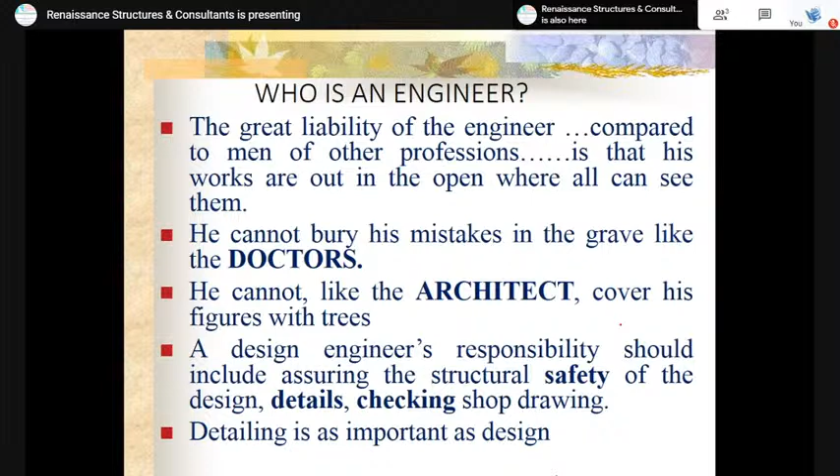So the design details, checking, shop drawings are the roles, and detailing is important, related to the design. The requirements of good detailing: it should be simple fabrication and placing details. This is important for your detailing sheet. Check the spacing for crack control, the maximum spacing, minimum spacing for concrete placement, and check the splicing requirements and the development length for your beams. Take special care of sections with varying depth and sloped slabs, and care of corner joints, beam-column junctions, openings, etc.

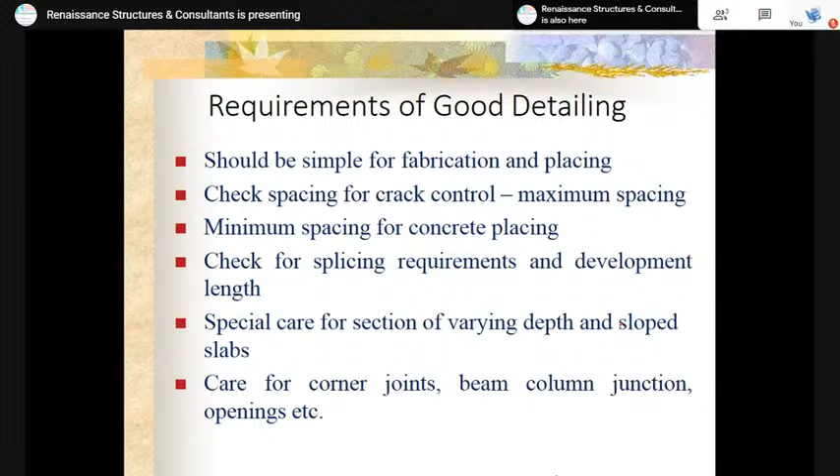You can refer to these for detailing. This detailing is for gravitational loads, which is different from lateral loads, especially seismic forces. So what are seismic forces? That is the earthquake load. The earthquake load occurs in the x and z directions. Okay, that is responsible for the strength of the building.

Okay, you can assign your seismic forces in your building. That load is for the entire structure, and that is called the seismic forces. Then you can define this particular load in your software and assign it in your building. And before that, you should know about the seismic zones, the seismic soil strata where it is located, and what the importance factor is. Okay, so these are all important.

Apart from the detailing above, there are different detailing requirements for the rehabilitation and strengthening of damaged structures. So this is also important. So SP16 and IS456 codes are needed for this.

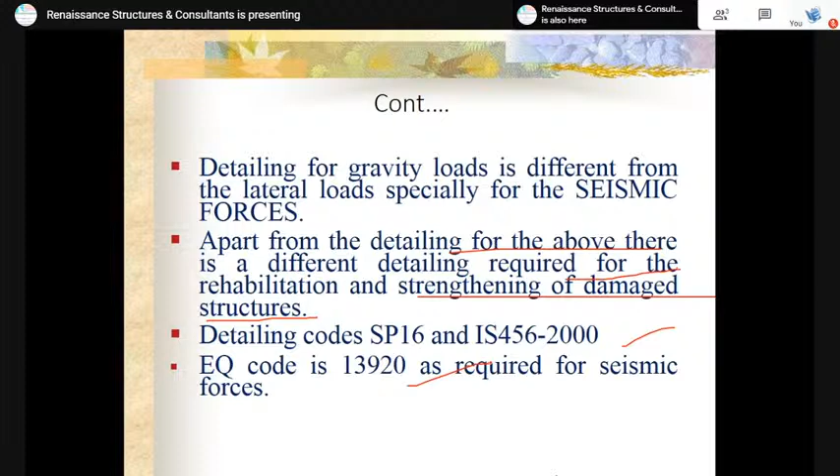Okay, next I'm going to discuss the objective type questions from these kinds of areas that companies expect from fresh students. Students should be able to explain questions from HR, from the company managing director, or from the site engineer, etc. So what are the questions from the design of RCC area?

Clear cover should be provided for each and every member. It depends upon the location of the building, the capacity of the building, and the design considerations. First, it is to develop the desired bond strength throughout the perimeter of the steel. That is called the bond strength between the steel and the concrete. Second, it is to protect against corrosion and fire.

And what is the minimum cover? First, 20 mm cover is needed for your slabs. A slab is a horizontal member where only the thickness is small. So you provide 20 mm of cover as a minimum for your reinforced concrete slabs. This 20 mm will keep your reinforcements safe against corrosion and fire, and the same 20 mm of cover maintains the stability of your bond strength, with respect to your cement and your steel sections.

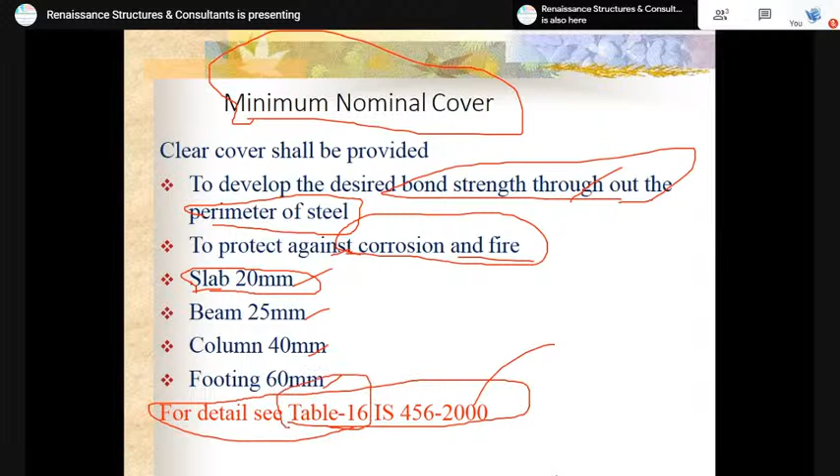Sometimes the design engineer asks questions to the students: which code book is suitable for cover? Minimum cover and maximum cover, what is the nominal cover, and which code book are these details from? So you can explain to that particular engineer or HR that these details are from the IS 456 code book, specifically table number 16 for cover. Then next is spacing of the reinforcements.

What is called spacing of the reinforcements? It is needed for any member. When you analyze and design your column, beam and slabs, you maintain proper spacing within your reinforcements. The horizontal distance between two parallel main reinforcing bars shall not be less than the diameter of the bar if the bars are of equal diameter, the diameter of the larger bar, and 5 mm plus the nominal size of the aggregates. So you check all three conditions. This is called the spacing of the reinforcements.

So you choose the equal diameter, the maximum diameter of your larger bar, or add 5 mm to the nominal size of the aggregate. Mostly we use 20 mm size of aggregates for RCC, so you assign 25 mm. That is the minimum spacing of reinforcements. The maximum spacing is as per the design, related to IS 456, particular to the column, the beam, etc.

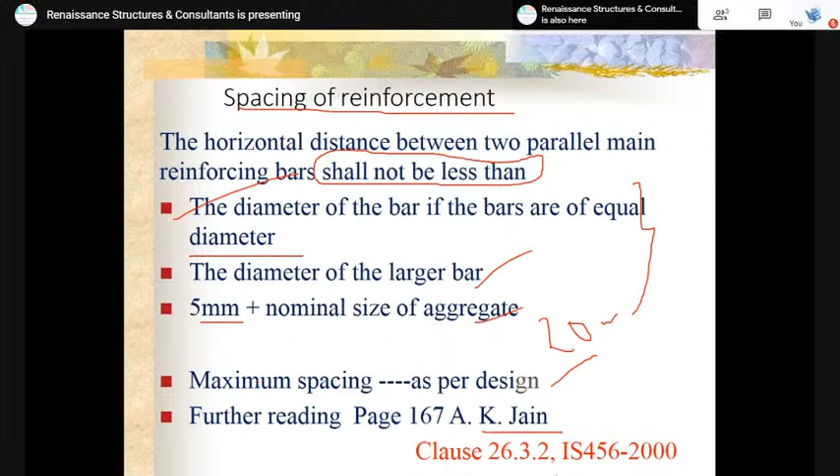Then limits for the reinforcements. So what are all the limits you can maintain for the beam? So minimum area of the reinforcement, that is As/bd, is equal to 0.85/Fy. Okay, this is from your IS 456 code book, which is related to the limit state method. Okay, so maximum of 4% of the bD.

What is called as 4% of bD? Then you can analyze and design without this problem. Nominally, you can find the percentage of reinforcement. For example, as per the basics of site experience, this is one of the columns. So this is for the b and D. So you can assign 4% of the reinforcement area in this particular column.

Okay, that is 1600 mm square. Okay, 1600 mm square is for your maximum of the reinforcements. So then you can choose the 16 mm bar, 20 mm bar, 30 mm bar, based on the availability of the reinforcement near your source. Then you can multiply by π d square divided by 4. So you can use 20 mm dia rod. You can multiply by π into 20 square by 4, and you can assign the number of rods, into 4 or into 6.

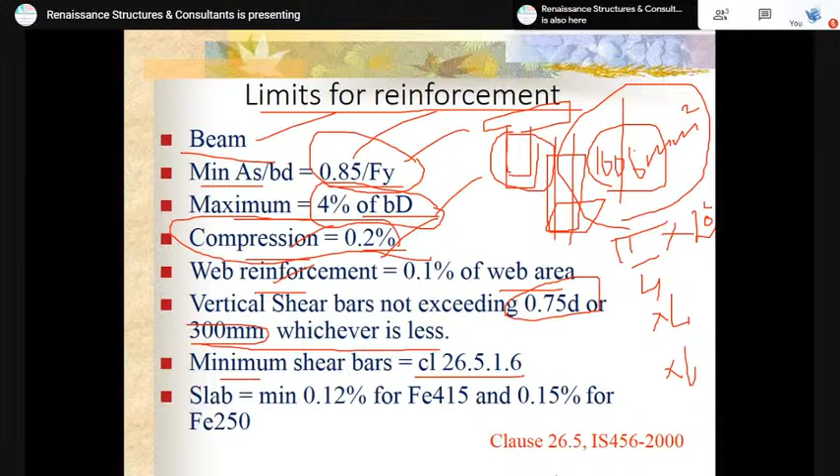Then the slabs. So minimum of 0.12 percentage for all flat slab surfaces. Okay, this is for the Fe415 and 0.15 percentage for the Fe250. This is one of the important interview questions. I'm going to use Fe415. What is the percentage of reinforcement in the particular slab portion? You can refer to this PPT. So 0.12 percentage for Fe415 steel, or 0.15 percentage for Fe250 steel. This is important during the interview.

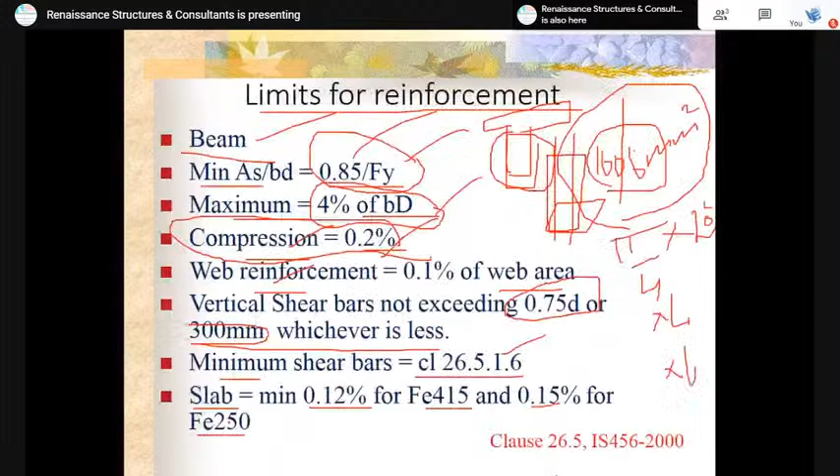Okay, and stirrups, what are all the ties possible? The minimum size is 8 mm. So in each and every building, the ties are minimum 8 mm nowadays, to resist the lateral load, and the hooks shall be bent at 135 degrees towards the end. It is called a 135 degree hook bend. And in columns, the bars are not less than 12 mm. More than 12 mm is suitable for your main columns.

Okay, a client, sorry, HR question is possible: I'm going to use 8 mm dia in this column. How many are needed to withstand the self weight of the column? You can explain: 8 mm is not suitable for the column member. So minimum is 12 mm.

This is from IS 456. So the spacing of the bars is not greater than 300 mm. You can assign that for your main reinforcement spacings. So the maximum you can utilize: 230 by 230 is for the residential building, 230 by 460 is for the commercial building, and as per the design specifications you can assign. But minimum is 230 mm.

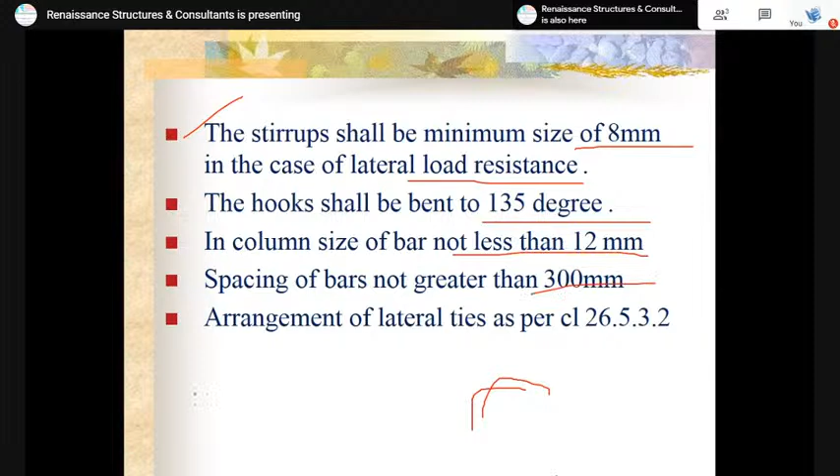So the spacing is limited to not more than 300 mm. So it is not suitable. It is suitable when you design for a multi-story building, where your column size is 460 by 460. After deducting this cover, your contacting surface area within the reinforcements is 300 mm. It is possible. Otherwise you can maintain the spacing so it should not be greater than 300 mm.

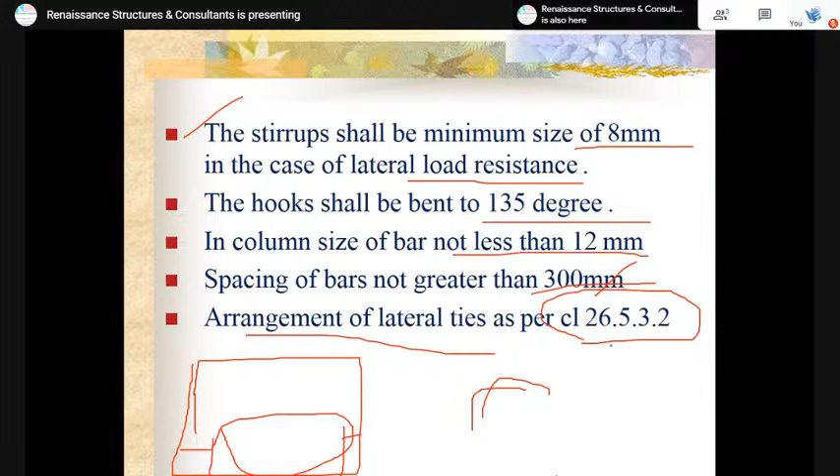The arrangements of the lateral ties are in the clauses from IS 456. So what arrangements are available? You can check this in the code book. So, development length of the bars. For concrete grade M20 and steel strength Fe415, you can maintain this kind of

development length. So serial numbers 1 to 9 are related to the dia of the bar. So you can assign the 8 mm dia in your slab or in your cantilever type of slabs. In the tension zone you can maintain 376 mm, and the compression zone is 301 mm. So this is the contacting length. What is called contacting length?

So I'm going to assign this 8 mm rod for my slabs. Consider this is the slab. Here I'm going to assign the support, and here the cantilever projection. You can consider 8 mm reinforcements, and you can connect one more length to the main support. So 376 mm is needed for development length.

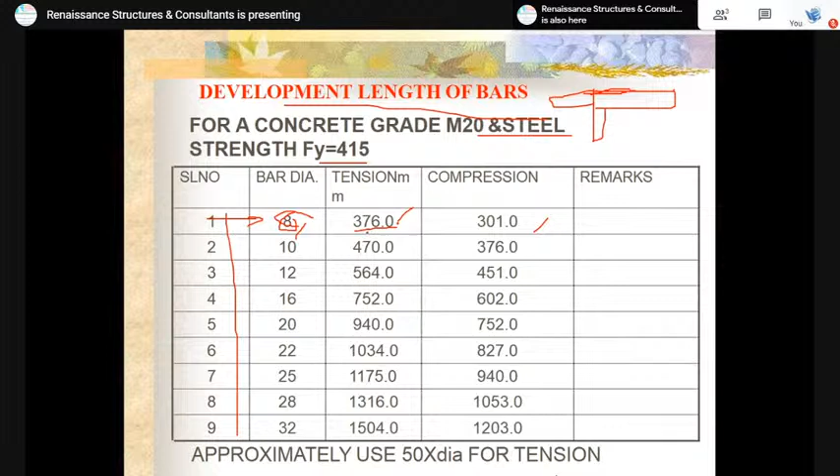So there is the normal reinforcement, and here you can assign this reinforcement. You put 376 mm, mm, not mm square. So that is needed in terms of the tension zone; in terms of the compression zone, you should maintain a 301 mm length. So simply, I'm explaining once again.

So this is my normal reinforcement. I'm going to add one more reinforcement, 8 mm rod, to the one end. Here one end is available, here one end is available. The reinforcement length is enough. 376 mm is for the tension zone, 301 mm is for the compression zone.

So it is available. This is an interview question for design engineer or execution department; people compulsorily ask this during interviews. Then you can assign 10 mm. So 470 mm length is needed for the overlapping, and 376 mm is needed for the compression zone overlapping. For 12 mm rod, 564 mm is needed, and 451 is needed for

the compression zone. 16 mm dia, used in your column, you can maintain 752 mm length for each tension member, 602 mm length for the compression member, and 20 mm is for 940, 752. 22 mm is for 1034 mm, 827 mm for the compression zone. 25 mm: 1175 mm, 940 mm is needed for the different tension and

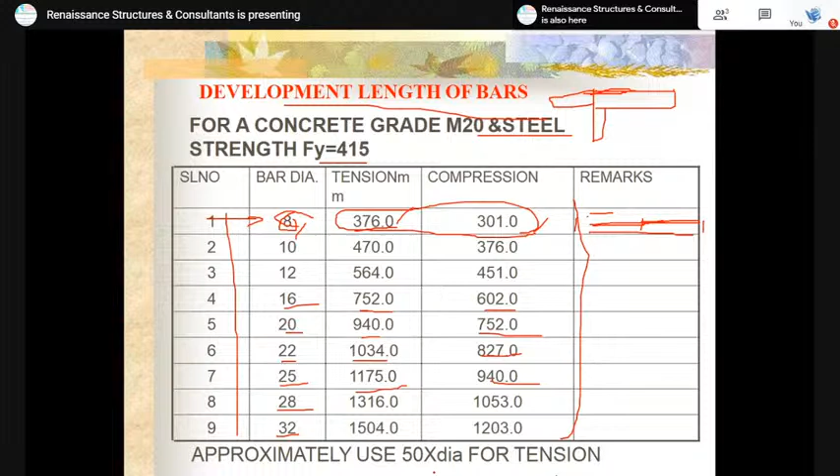compression. So 28 and 32 respectively for 1316, 1053, 1504, 1203. All the terms are in mm. This is all approximately 50 times dia for tension. It is also possible. So this is the lap splicing. The lap splices are also from clause 26.2.5.1 of IS 456.

So you can refer to what the spacing of your lapping is, and how to measure this lapping distance from here to here. What is this inclination angle? What is this length? What is this inclination? Everything should be in your clauses. Sorry, IS 456, clause 26.2.5.1 of IS 456.

So you can assign this position in your column. When you rise from G plus 2 to G plus 3, you must compulsorily make the lap splicing. It is needed. So you can arrange this reinforcement. It is a different height from your slab number 2, and this is the same height from slab number 2.

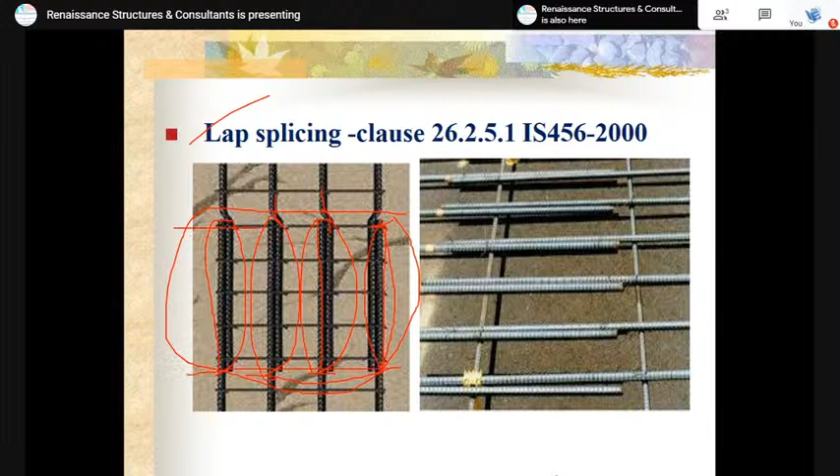This is for the different height from slab number 2. So these are all not equal, but you can maintain these in a zigzag arrangement - this here, this here, and this here. So zigzag-wise, this lap splicing arrangement is possible during the quality inspection of your constructions. You can check for this one.

Next is for lap splicing. Lap splicing should not be used for bars larger than 36 mm, so you can't assign lap splicing there. A 36 mm bar is not suitable for cranking - you'll face difficulties during construction. That's the reason lap splicing is not suitable for 36 mm bars.

Bars larger than 36 mm may be welded instead. You can assign two different 36 mm bars in your main column and weld them to that particular main column.

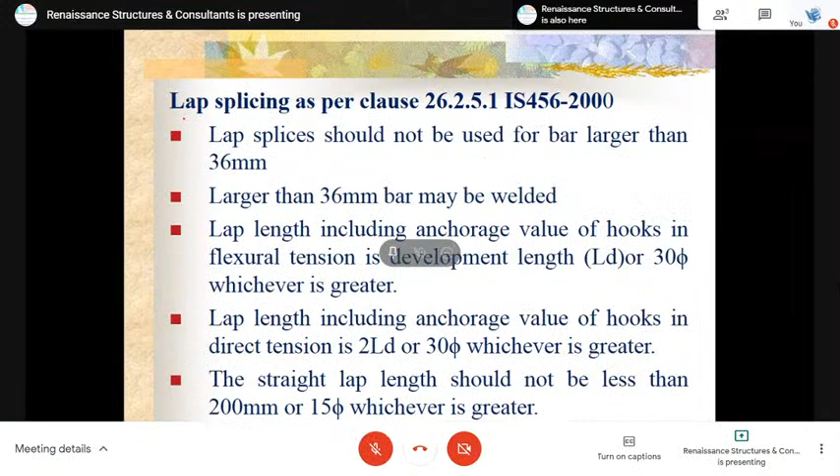Next is lapping length, including the anchorage value of the hooks in flexural tension. It is development length LD - LD means development length of your member, or 30 times your diameter, whichever is greater. You can assign it for the lapping length for anchorages.

You can assign it for the end zone - it is related to the flexural tension member. LD is L into the diameter, where L is the length of your member and D is the diameter of your bar. So you multiply to get one value, or 30 times 20 mm dia gives 600 mm - whichever is greater is the lapping length.

Or the lapping length including the anchorage value of hooks for direct tension is 2 times the development length, or 30 times, whichever is greater. Why the difference between these values? For direct tension you multiply by 2LD, for flexural tension you assign LD.

This is the difference between flexural and direct tension. So 2LD is for direct tension, and one LD is for flexural tension. The straight length of the lapping should not be less than 200 mm or 15 times the diameter, whichever is greater.

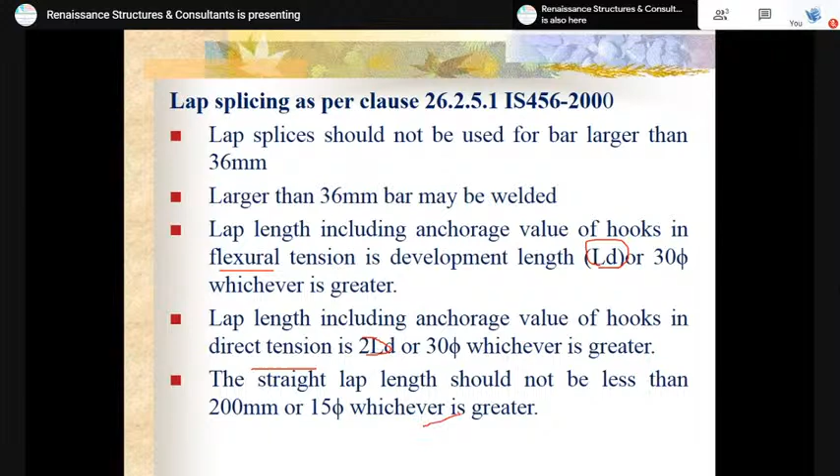This one is important for interview questions. So, continuing on lap splicing - these lap splices are considered staggered if the center-to-center distance of your reinforcement arrangement is not less than 1.3 times the lapping length.

So you can assign 600 mm - it is suitable, but this should not exceed 1.3 times the consideration length during staggered reinforcement.

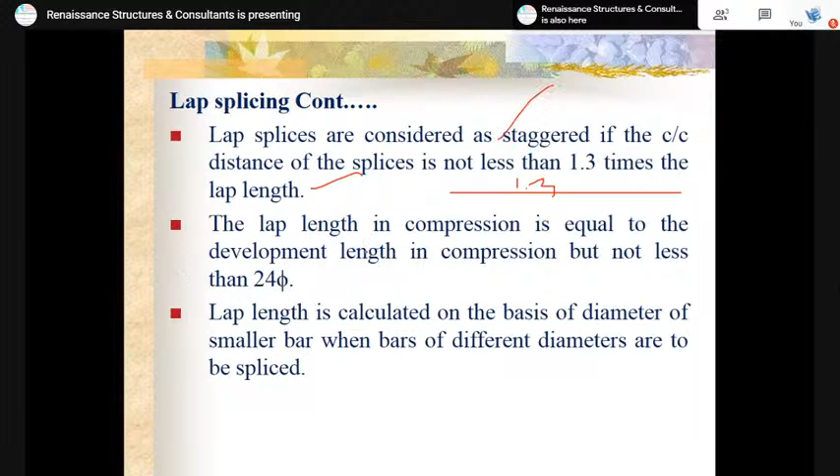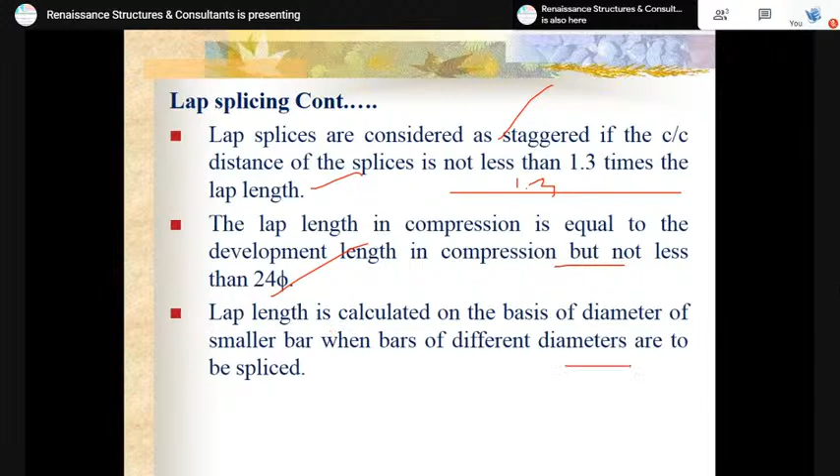So do the detailing properly - prepare the drawing properly and with accuracy. This is important, and prepare the bar bending schedule if necessary. This is also important.

Next is to indicate the proper cover to the reinforcement - this is important. Then decide the location of the opening hole, and adequate details for the reinforcement surrounding openings. This is important - you should focus on the reinforcement around openings and maintain adequate details to support the member surrounding extreme load-acting values.

And use commonly available sizes of reinforcement bar - spiral shall be used for reinforcements. You should assign available sizes; for example, if 23.5 mm is needed but that size is not available, you should use an available size of reinforcement for your design considerations, such as 8 mm, 10 mm, 16 mm, 20 mm, or 22 mm.

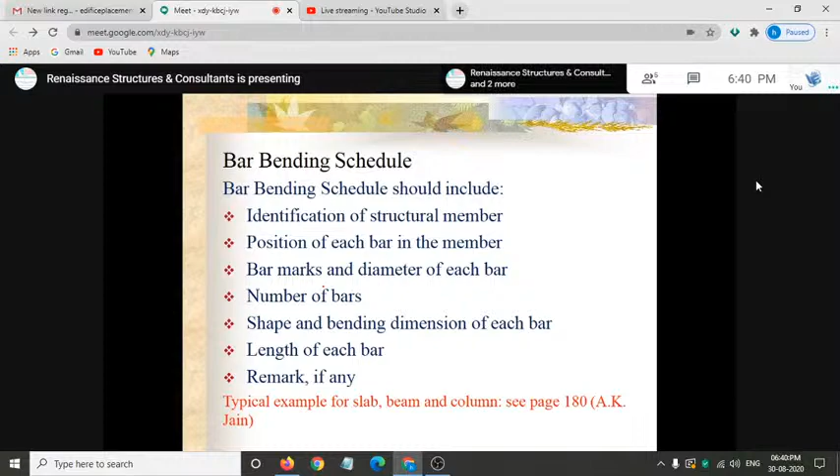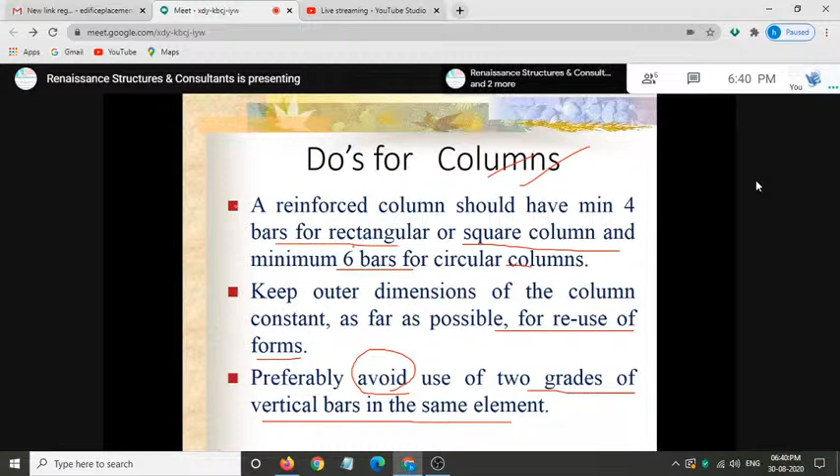So do's for the column, do's for the beam. So what are the columns? You can assign 4 numbers of the main reinforcement for rectangle and square columns. This is needed. For the circular column, you can use a minimum of 6 number of bars.

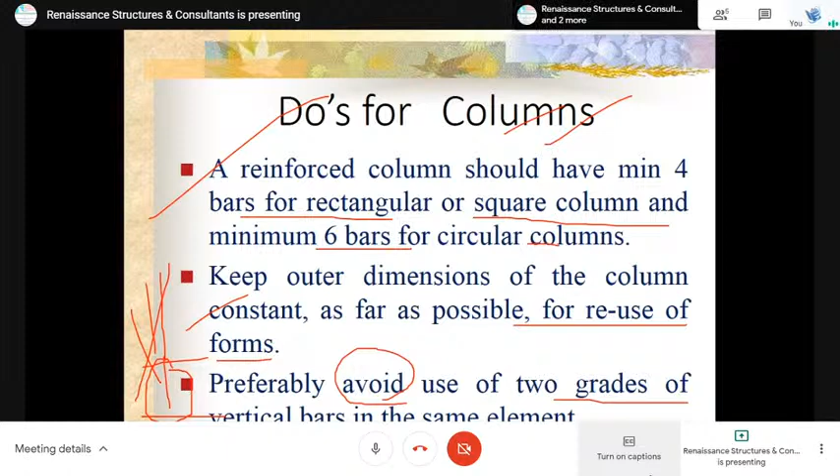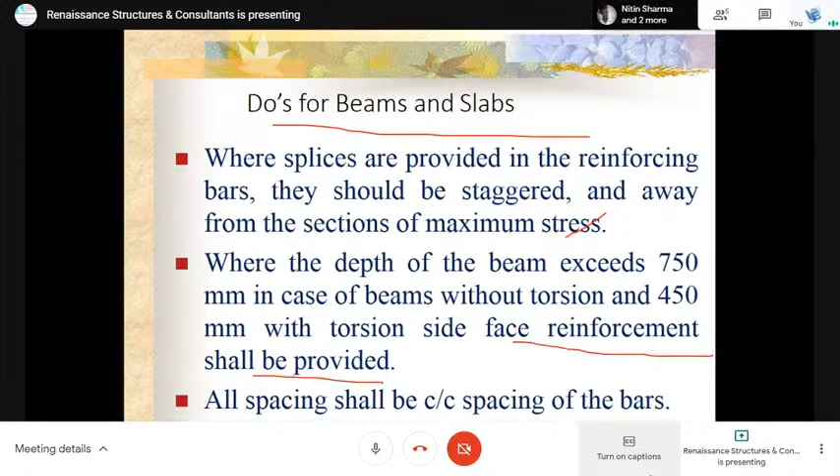Side face reinforcement should be provided. Facings are in the proper arrangement. Okay, this is for the reinforcement.

So finally you can get the view for the bar bending schedule. So the schedule is important for the identification of the structural member. So your arrangement is explaining this, this is the identification of the member.

And the next one is for the position of each bar in the member. And you can see the bar marks and the bar diameter of each bar, number of the bar, shape and the bending dimensions of each bar, length of all the bars, remarks if any.

Okay, what is called remarks? So you give the projection.

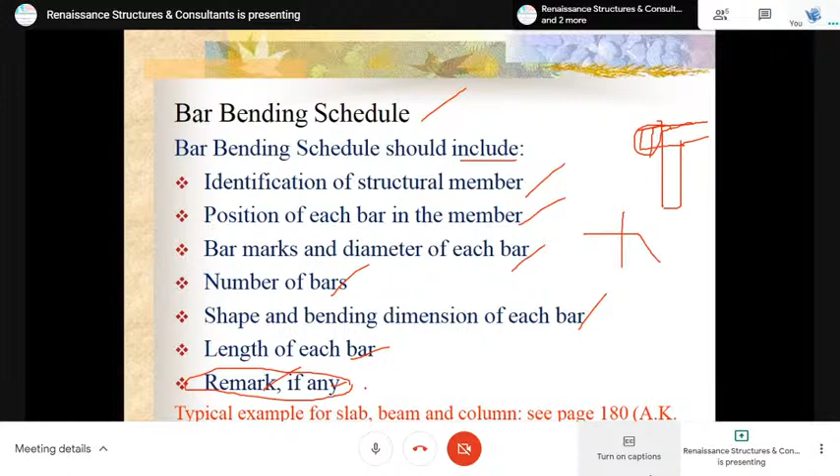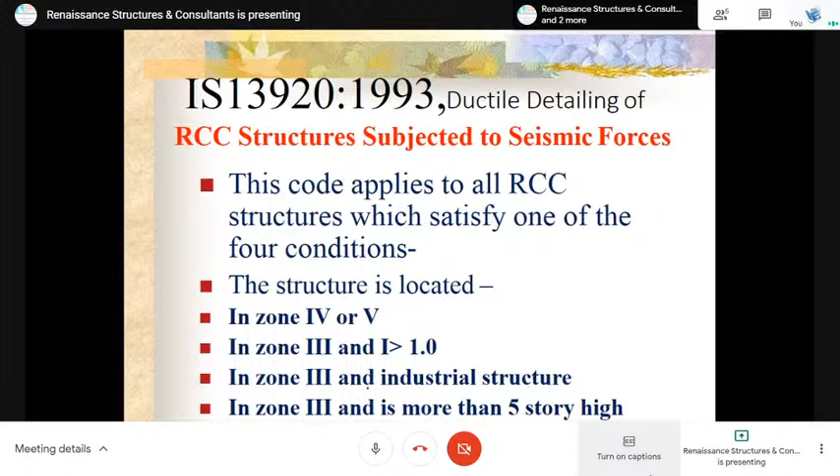And the zone 3, that is the one.